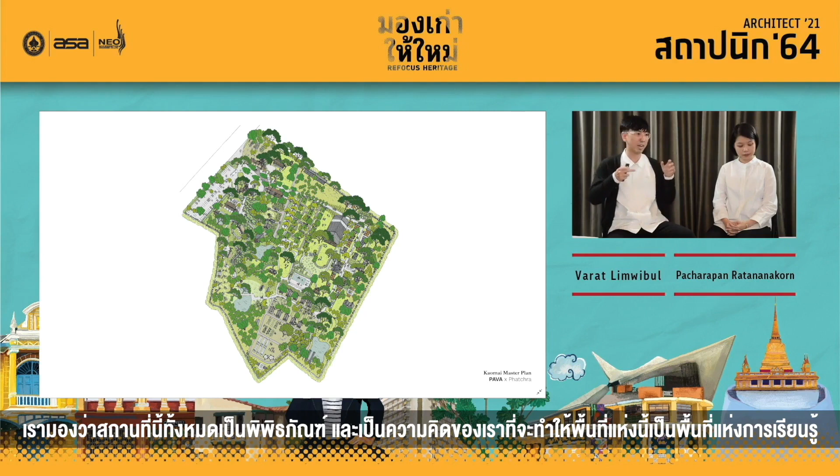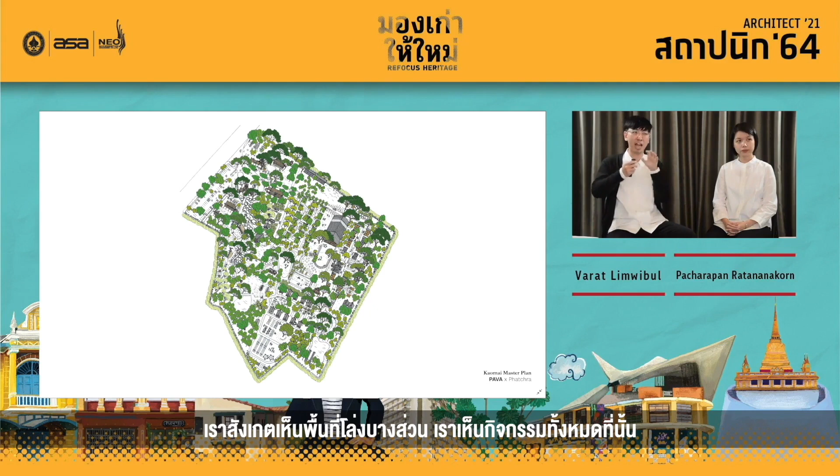So we decided to step back a little bit to draw and map the representation drawing here. This drawing represents the true scale of the buildings and the tree heights. We understand the relationship between the trees and the buildings. We notice some of the open spaces. We see all the activities, and then we come to analyze all of the information and detail on site.

Starting from the first diagram on your left-hand side here, the brown color means the high point condition. This high point condition is very dry; it's very suitable for the conservation area. On the other hand, the water basically flows from the high point down to the low point here, to the street. So that means the land slopes like this.

We found many low point conditions. The low point condition is like a valley that can contain the rainwater. So we had an idea to suggest a farming area and a wild preservation area. And because of that topographical analysis and hydrological analysis, we started to divide the program of the new master plan here.

On the high point is the conservation area. These open spaces and low point condition are suitable for farming. Here is a wild preservation area. There are so many species of plant happening here. The area that sits next to the street is going to be the parking lot and services area here, surrounded by the Kaomai Hotel and Resort.

It's kind of a challenging situation that very private programs sit in the middle of the public program. So we create a big loop of circulation on the right-hand diagram, so that this public circulation surrounds the private program in the middle. And we minimize the parking footprint.

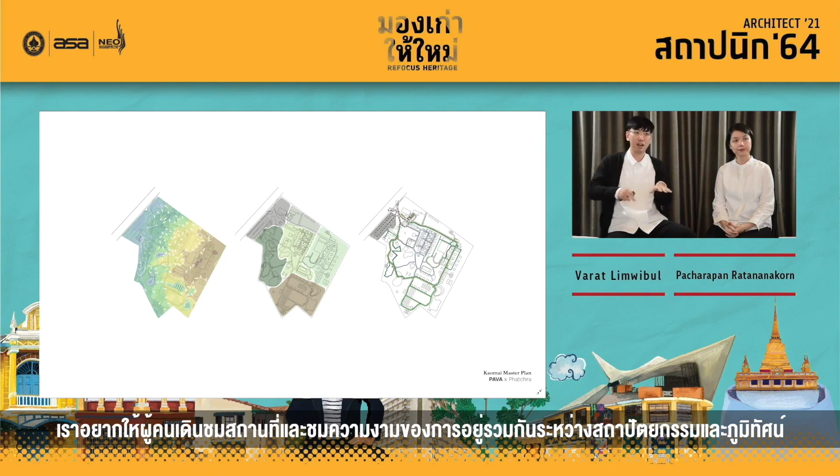We want to minimize the accessibility of the car here, but be aware that we need to design the circulation for all generations of people, from the young generation to the elderly and to disabled people. That means this big loop of circulation provides golf cart circulation so that all people can access all the programs. Besides this big loop of circulation, we promote bike lanes and pedestrian pathways, because we want people to walk on the site and see the beauty of the symbiosis of architecture and landscape.

So in the next diagram, we record and analyze all of the existing tree conditions. You can see the big canopy of trees here contrasted with the small canopy of trees. We start to understand the history, the multi-decade trees, tamarind trees, very beautiful, very powerful rain trees here beside the Kaomai resort area. So we start to understand that the tree performs itself as a landmark that links many programs together. It's very critical for us.

The next diagram is talking about the existing structural building condition. The gray color we need to preserve, the pale yellow color we need to adapt and reuse, and the orange color we need to introduce a new design because of the context that is so different from each other.

And the last diagram is talking about the directional signage system on site. It's talking about outdoor landscape furniture. It's talking about the lighting design system, because we want people to see the museum not only in one single building, but the whole site. So walkways, pedestrian ways, bike lanes, and all of the lighting and signage systems need to be integrated as one single system.

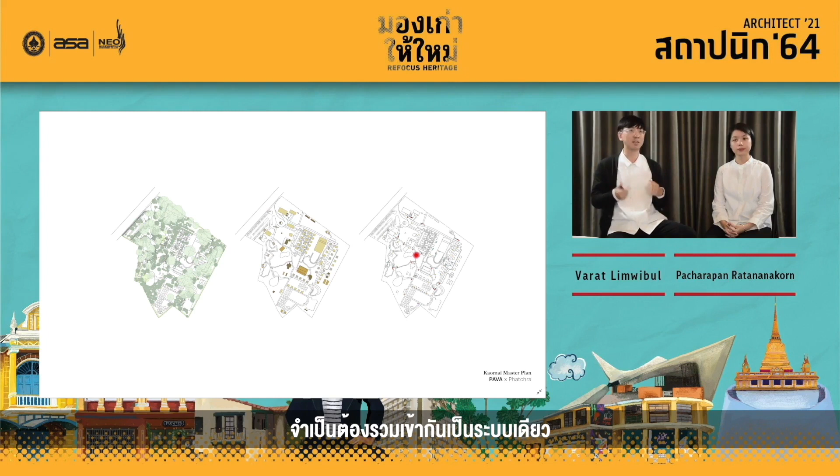After a series of surveys and research with our consultant, we proposed a subtle design intervention into this estate. We do not demolish any barns. We preserve all the healthy big trees to remain and keep the spirit of this place and continue to pass it on to the next generation.

This is the elevation of every barn on this site. We set different degrees of design intervention into each barn on a case-by-case basis. For example, if the barns are in fair condition, we preserve them as they are and just clean and repair some small parts. If they are very decayed and dilapidated, we have to restore them and replicate some missing parts as original.

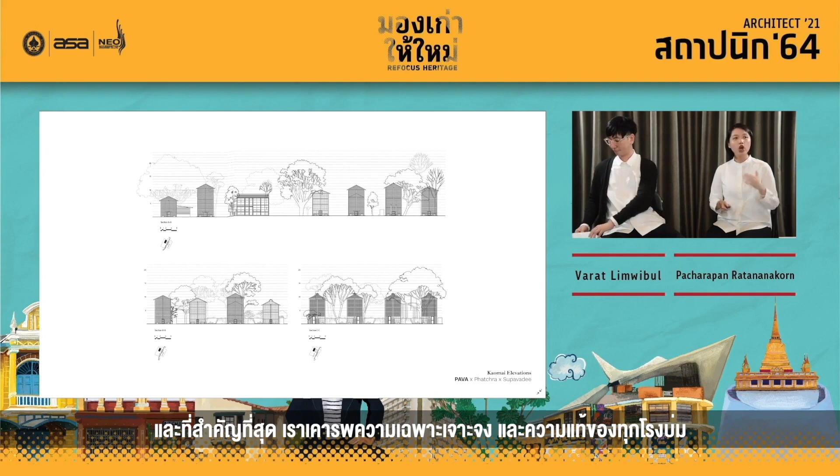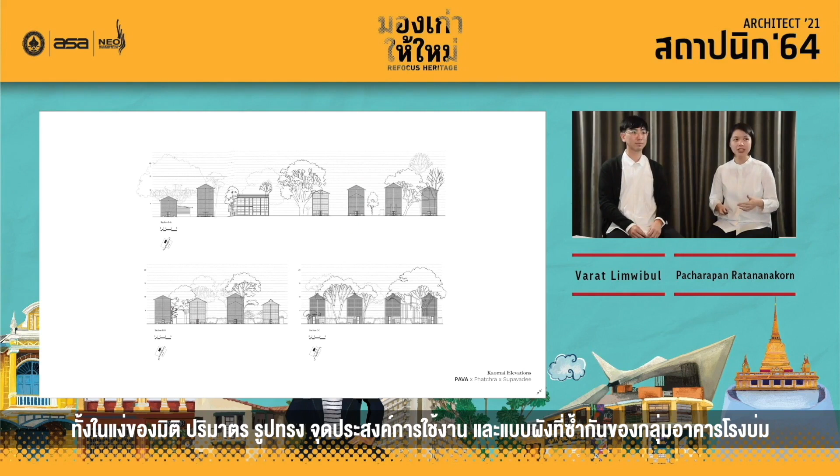Most importantly, we respect the specificity and the authenticity of every barn in terms of dimension, in terms of volume, form, in terms of function, and the repetitive planning typology here.

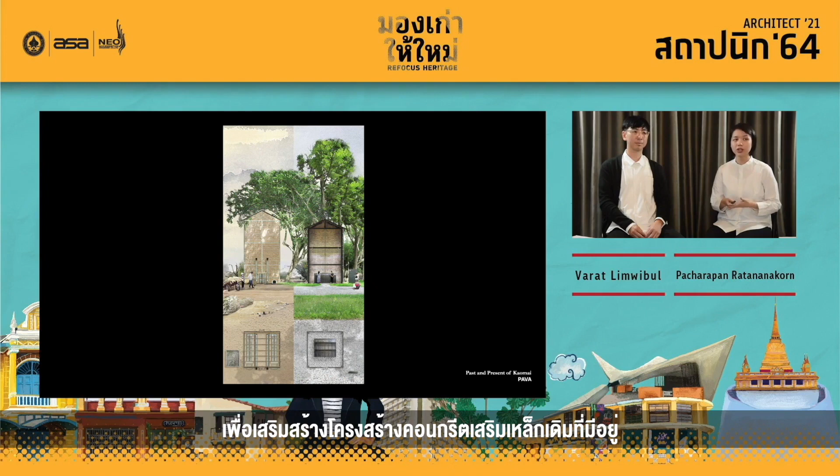Every original barn is preserved, and some barns were added to with a new design of dark gray steel to strengthen the existing reinforced concrete structure and to differentiate the new and old conditions. For the preservation part, we work with our building conservation consultant Supawadee to survey the existing condition and set different degrees of design intervention toward each barn.

Fortunately, most of the buildings are in fair condition thanks to their location on the high point and thanks to the tree density surrounding them that helps protect the buildings against strong winds. However, if they have some cracking, flaking, or leaking parts on the roof, they need to be repaired.

This is an example of the minimum intervention into the barn. We respect the originality of the barn by preserving the 6 by 6 meter barn size on the plan, and we preserve its volume with the gable roof on top. We reinstall the original fixture here.

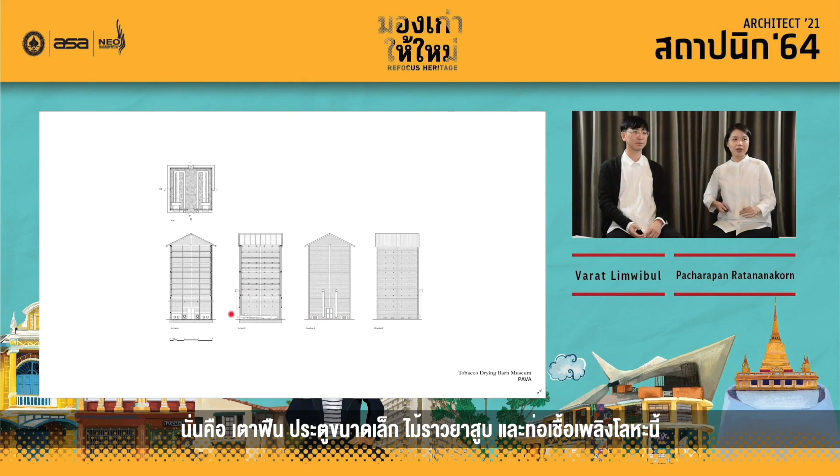Inside the barn, we restore every single original element to show the mechanism of this tobacco drying barn in the past. This one is a metal fuel pipe here on the lower part, and we also reinstall the tobacco hanging sticks on top. The number of these sticks shows us that there was a lot of demand for drying tobacco leaf in the past. This volume was so dark in the past.

When we want to open to the public to learn about this space, we install the new lighting design to illuminate the authentic space and exhibit it to the public. We also replicate the small door as original.

Every void in the barns we preserve as original, starting with the fresh air inlet on the lower part of the barn. This is the observation window that we cover with expanded metal and anchor steel to prevent animal entry. On the walls, we preserve all the small holes here because it's quite fascinating for us and shows how the tobacco hanging sticks hang on the wall.

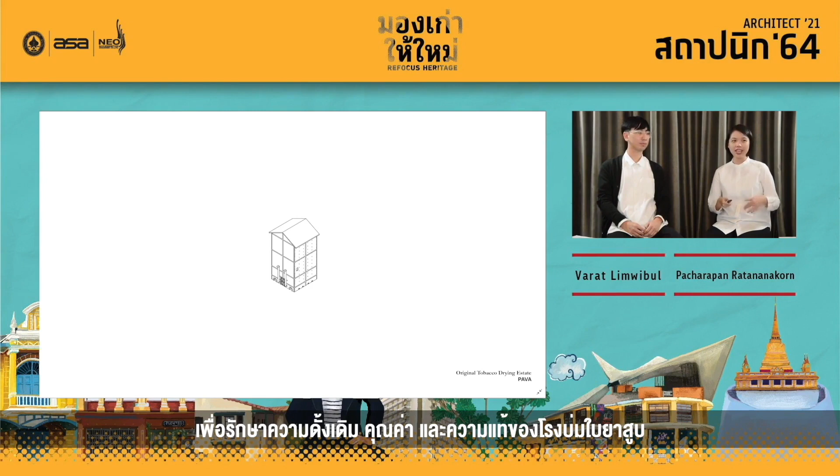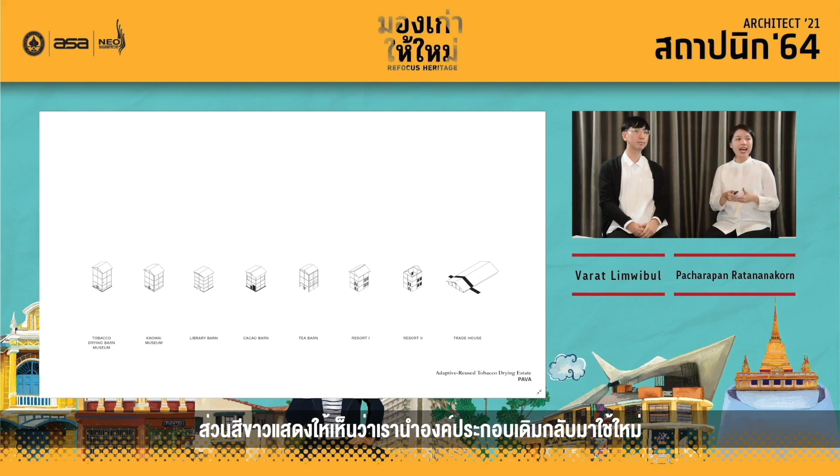Most importantly, the rows of tobacco drying barns of different ages along the historic routes exhibit themselves as real witnesses and evidence of time. From our adaptive reuse strategy, this is the minimum design intervention to preserve the originality, value, and authenticity of tobacco drying barns. To the next level, these diagrams show the minimum to the maximum intervention into the tobacco drying barns. The white parts show that we reuse the original elements, and the black parts show that we insert the new design from adaptive programs.

Okay, as Trish mentioned before about the degree of design intervention, from the minimum on the left-hand side to the maximum on the right-hand side, I'm gonna talk in detail step by step. The first one is the minimum one. We want to preserve and keep the barn typology's originality, so we reinstall everything that it used to have, like the fire furnace, metal pipe, and tobacco drying sticks. The next one is Kaomai Museum. We insert the new structure for the future expansion area, and at the center, we have the 3-meter-wide exhibition panel.

For the library barn, we follow the minimum intervention, so we have an idea to integrate the bookshelf and the new steel structure together in order to minimize the design footprint. The cacao barn is another interesting design where we utilize the existing concrete brick and flip it up to be a canopy of this building. For Tea Barn, we sink it to humbly connect with the ground condition, and we have an upper level to connect another F&B experience.

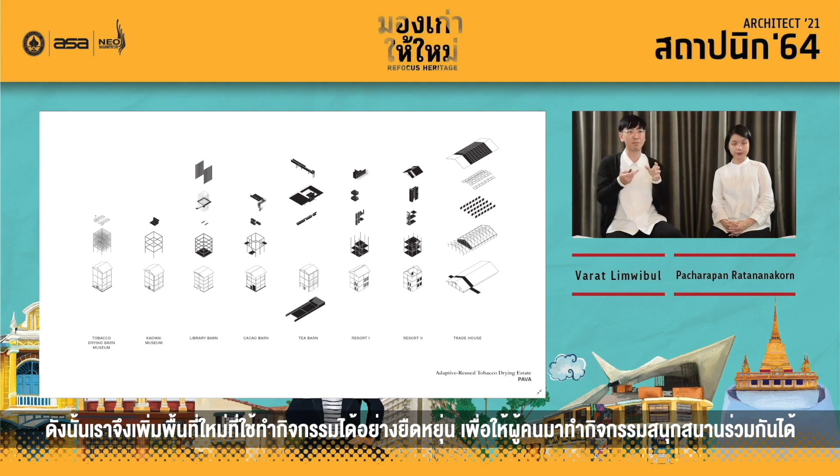For the resort, I'm gonna talk in detail later, but we want to keep the memorable facade outside and reshuffle and redesign the interior a little bit. For the trade house, it's all about connectivity. We want to connect Kaomai Hotel and Kaomai Estate together, so we introduce a new flexible space that allows people to come and have fun activities together. So here is the first one, Kaomai Museum.

The existing condition is very fair. The structure is quite good. And when we walk into the inside of the building, we are shocked and very stunned by the power of the volume. We see the light penetration from the wall here that comes into the space. It looks so amazing, and we want to keep this spirit of place.

So we talk with the structural engineers and the client. Okay, we want to keep this space, the sense of the space. So we just remove the roof and we insert the steel structure one by one here. And after finishing the installation, you can see the existing volume with the new I-beam dark gray steel structure. All the side is the same, the brick is the same, the timber roof structure is the same thing as well. We replace the roof back.

We want to show the people the differentiation between the new dark gray color and the existing one. People walk in and can know that, okay, this is the old one, this is the new one. We want to highlight the new and old condition. And when we walk through the space, we see the frontal exhibition panel. We keep the appreciation of the darkness on top and very light condition on the ground. We keep the wall, we keep the penetration of light.

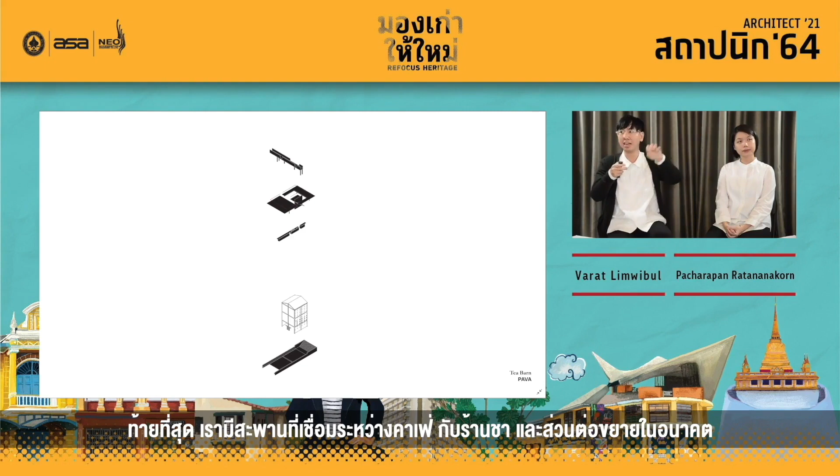So we start to use the reconstruction technique: we measure everything from the column, the beam, the size of the brick, the gap of the mortar, and we ask him to remove a set of brick and label everything in order to use this set of brick and reinstall, reconstruct everything as it used to be, but fit to the future program of the retail area.

Here is the section perspective. You can see the humble sunken space here that connects the people from the amphitheater and the Kaomai Avenue at the back. This sunken technique highlights the essential volume of the Tea Barn here. We introduce a very small intervention of lighting design here. We use the existing brick at the facade of the building. Here on the upper level is the increased capacity of the retail.

This one is in contrast to the Kaomai Museum, where we introduced the dark gray color of the steel with the existing brick. But here we want to have a subtle contrast of the very raw brick surface, the brick texture, contrasting with the new.

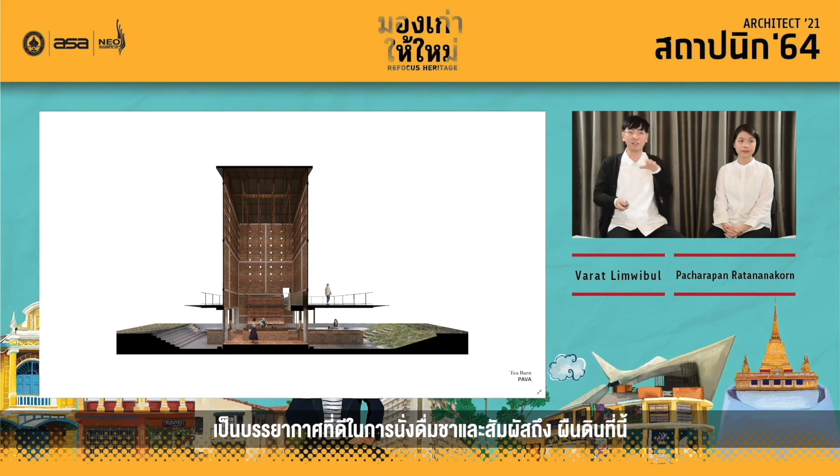It's not modern, it's more smooth. It's the contrast of the texture of the materiality here. And it's nice to have a feeling of drinking tea and feeling the ground condition as well.

Here is the Kaomai Resort. We have 2 degrees of intervention, but in both of them we try to preserve the memorable vertical green. In the first degree of intervention, we just introduce the experience of the tobacco drying barn. But on the other side, we utilize the maximum space of the building. We integrate all of the M&E, the mechanical engineering, the sanitary system, the electrical system within the bathroom as one single core to minimize the M&E footprint.

We want to keep it, but on the other hand, inside totally changes the atmosphere. The lightness becomes the darkness. We want to keep the sense of the darkness. We bring the wall of the tobacco drying sticks back to let the sunlight come inside a little bit. But the exposed brick here will contrast with the experience of bathing in the granite bathtub here.

And the final design intervention is the biggest one. As Trish mentioned before, this trade house is a socio-economic center of the community. People come here selling tobacco leaf, people buying tobacco leaf. We want to bring that sense back. But in terms of the new program, we want to create a flexible space that has multiple levels of activities here. The location is very important.

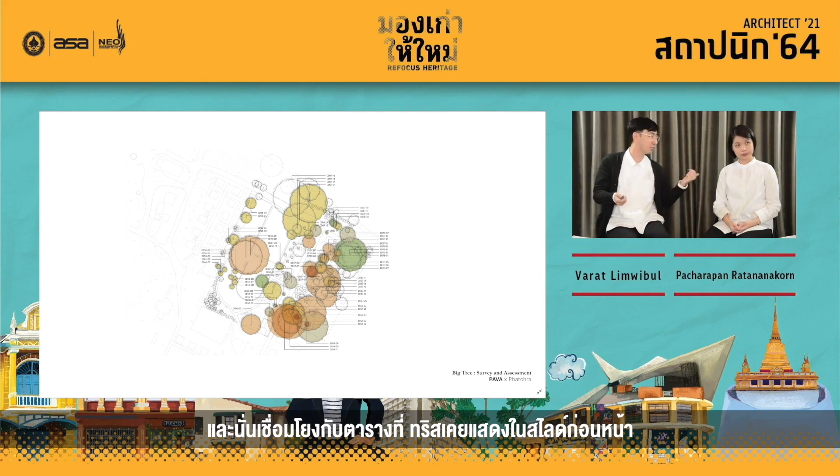After knowing what species of tree it is, we know the height of the tree, we know the canopy, we know the health condition of the tree, so we record and label everything on the diagram here. You can see the number here that indicates the status of the tree, and that links to the table that Trish previously showed in the past slide.

And we have to thank the owner for the very huge effort to maintain the trees. Here is the arboriculture technique that we use to maintain the tree, not only the crown raising technique, but directional pruning and thinning technique, in order to make the tree stabilize itself. We don't want to use steel bracing structures on the tree to make it stable, but we use the tree itself to balance itself, because the steel bracing technique destroys the memorial space of the place. As a result, we get a very good, very healthy ecosystem here, architecture, trees, and many things.

So because of that, we are not surprised at all that we found 100 healthy plant species and more than 50 species of birds and wildlife. Thanks to our specialist survey team and the Bird Conservation Society of Thailand that helped us check and record all the information here. And we are so happy and very surprised that we found the white-rumped shama bird, which is the indicator of the good, healthy woodland ecology here.

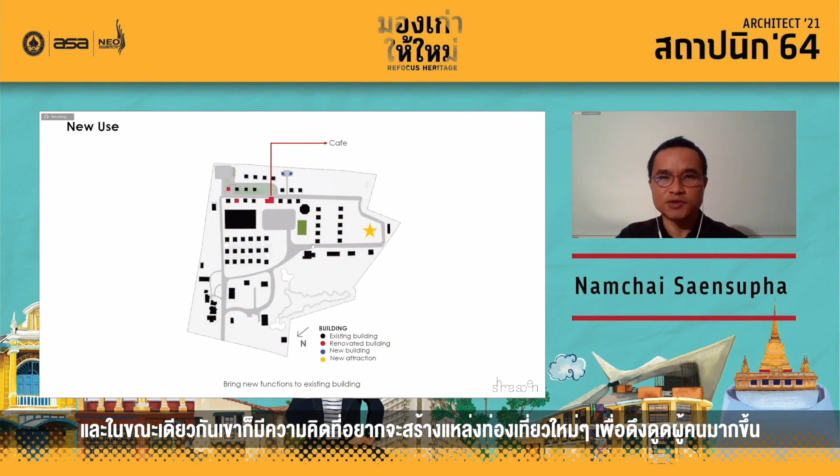The photo spot is here, the connection between the hotel and this tobacco trading building, and the new owner, the son generation, wanted to build a cafe here, facing the main open space of the project. At the same time, he had an idea to create new attractions to attract more people. At first, when we were contacted by this client, he said that he wanted to build a maze at the back area to draw more people to the project.

I think it is quite a good idea, and we would like to check out the space and see how it was. We did some research online and found that some people said the place is haunted. So anyway, we went on the site visit, and this is what we saw. This is the area at the back of the site, which comprises three generations of curing barns. The first one is bamboo weaving together with plaster.

And the second generation is the brick, which is the majority of the existing structures now, and part of them was turned into the hotel a long time ago. And the third generation, the newest generation, was made from the concrete block.

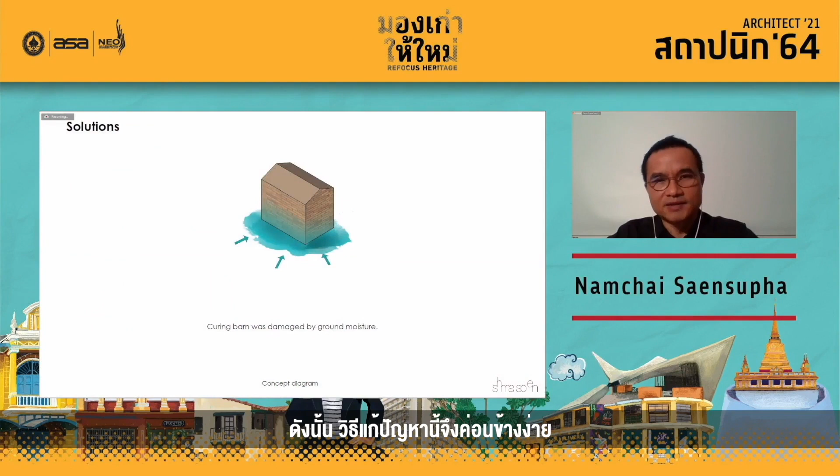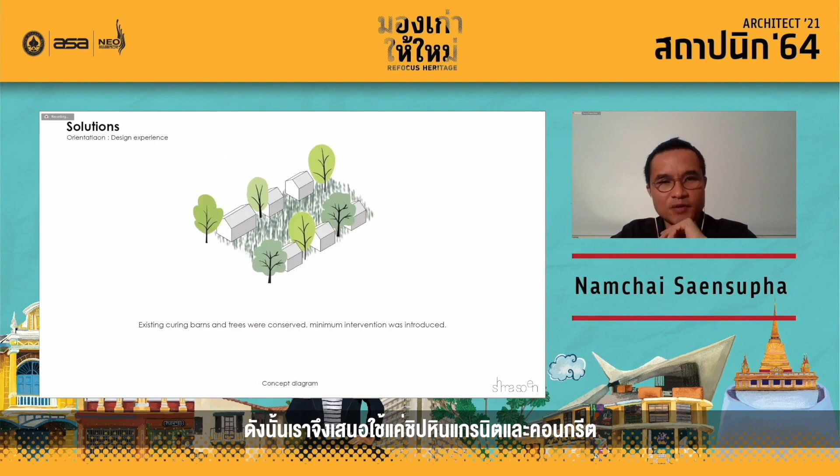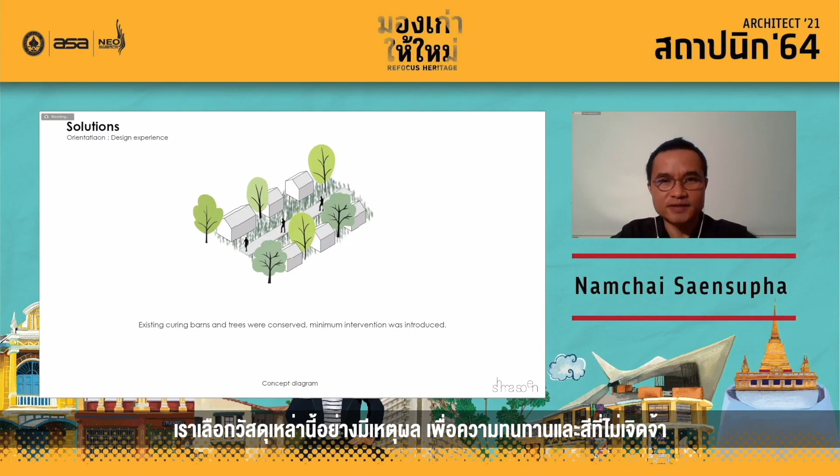And around the project, the father of the owner has been planting trees for more than 30 years. So scattered around the project were the handsome various types of big trees, giving shades and traces of time. The tamarind trees, which obviously are much older than 30 years now.

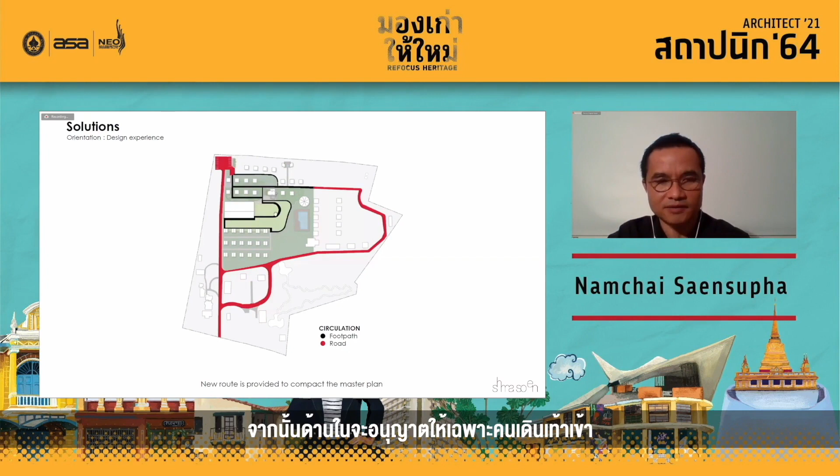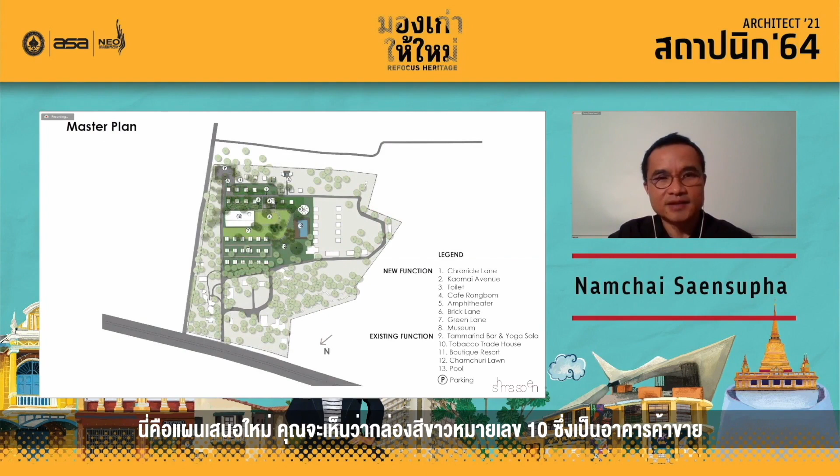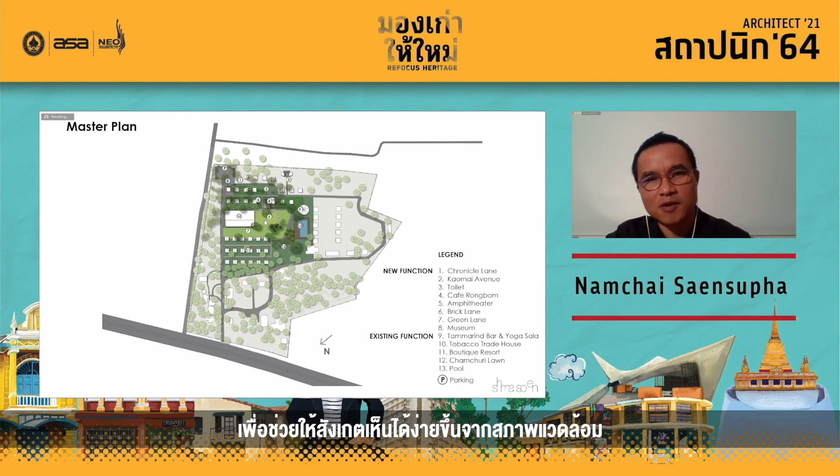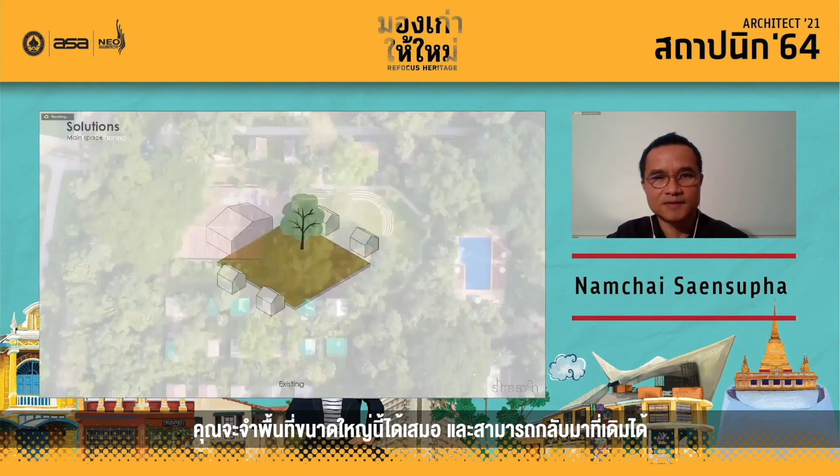Either you go to the photo spot next to the Green Hotel, or you walk to the other walkways that pass by the different areas of the building. You will always remember this big space and come back to it. So this is the process that we designed. We think that this facade of the old trading house is very good, and it can be a very good backdrop for the events here.

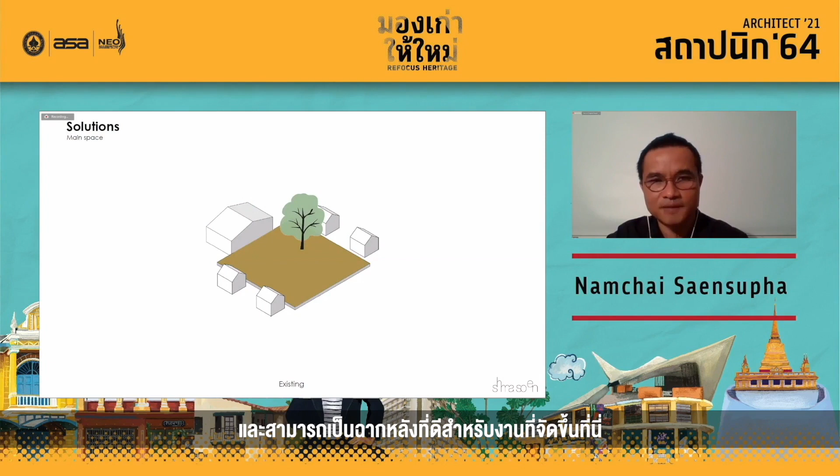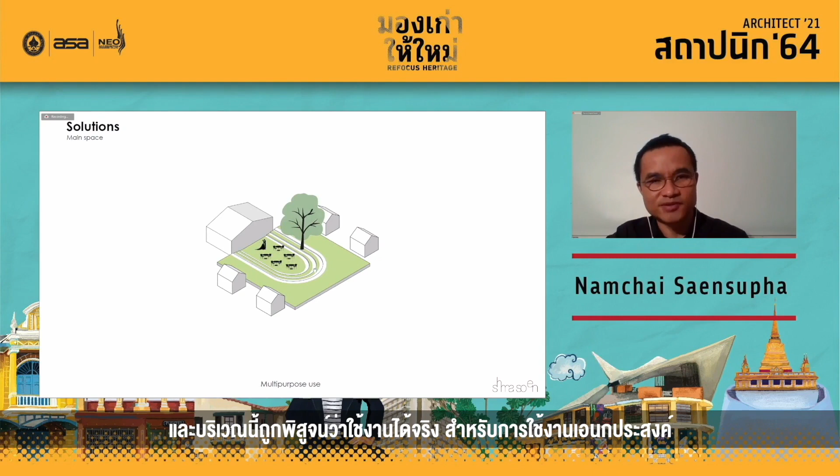So we propose to keep it, flatten the ground, lower it a little bit, so that when you are down there, you look up and look around, you look at the big trees, you look at the different buildings, and find yourself in the center of the space. And it proved quite practical, so to say, for multi-purpose use. This is the photo before construction, during construction, and after completion. All the trees are kept, and a few new trees are planted.

During the holidays, it became very popular. And at night, it can become a space for movies or banquets, or even just something big, open, green, calm to look at from the cafe or from the hotel. We still keep some of the undeveloped old curing barns, and provide an adventurous path and walkway if you like to have some adventures and feel a little bit of thrill and spookiness in this old area. We keep it as it is, just clean it up and make it safe for people to go there.

And I'm sure that those old curing barns are waiting to be utilized and to be given life once again. I think that with a minimal approach, minimal intervention, we try to keep everything, the building, the trees, the space, the atmosphere, as it is, and do as little as possible so that it becomes like an unpainted canvas for people to go there, to use, to enjoy themselves, and obviously to take selfies, which is quite a successful spot for people to come.